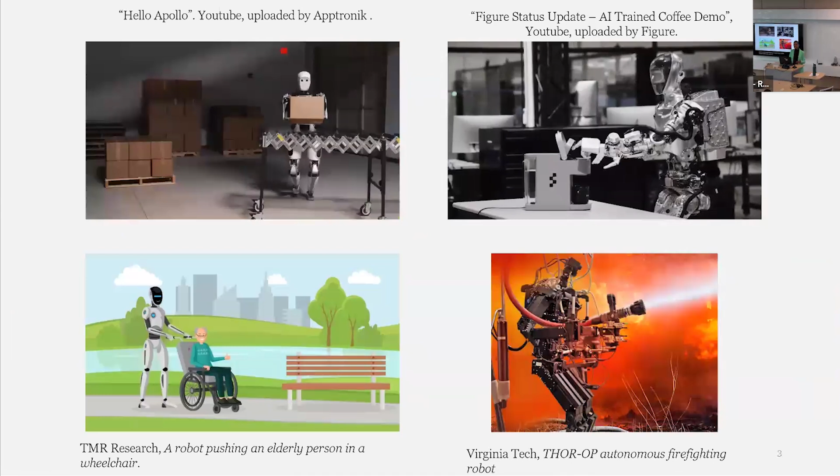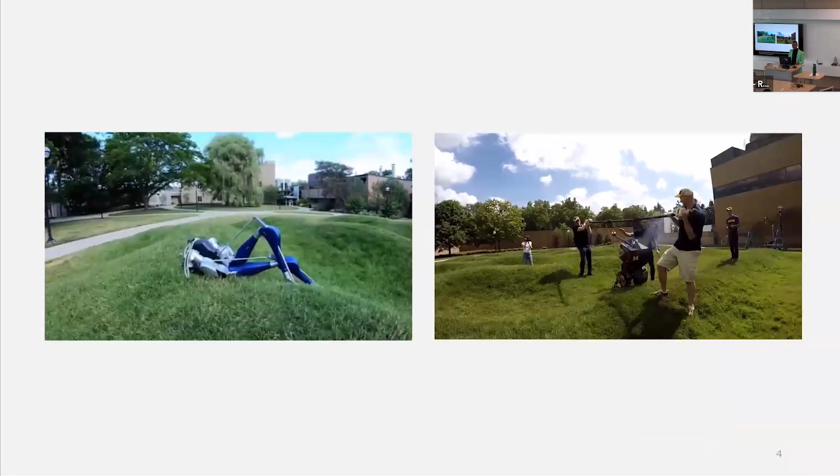However, despite their unique capabilities, the real-world deployment of bipedal robots is limited. Their limited deployment can be attributed to various factors, such as their highly dimensional, hybrid, and at times highly constrained nature, which makes it challenging to achieve a stable motion, especially in the face of disturbances and uncertainties. These disturbances and uncertainties can lead to a fault, which can then lead to a fall, as demonstrated by Cassie and MARLO on the screen.

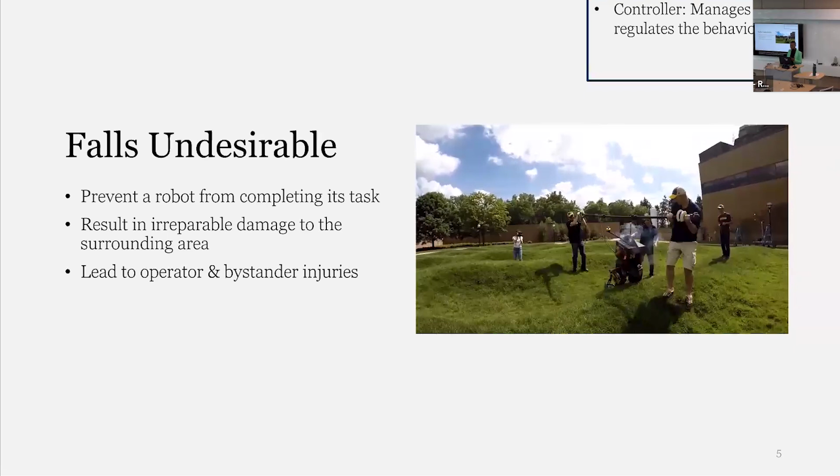Falls are undesirable because they can prevent the robot from completing its task, they can result in irreparable damage to the surrounding area, and they can also lead to operator and bystander injuries. And while a well-designed controller can counteract the effects of these disturbances and uncertainties, the infeasibility of accounting for all the potential disturbances and uncertainties that may be encountered during real-world operation still makes falls inevitable. Therefore, it's not only important to implement robust control algorithms, but also reliable fall prediction algorithms.

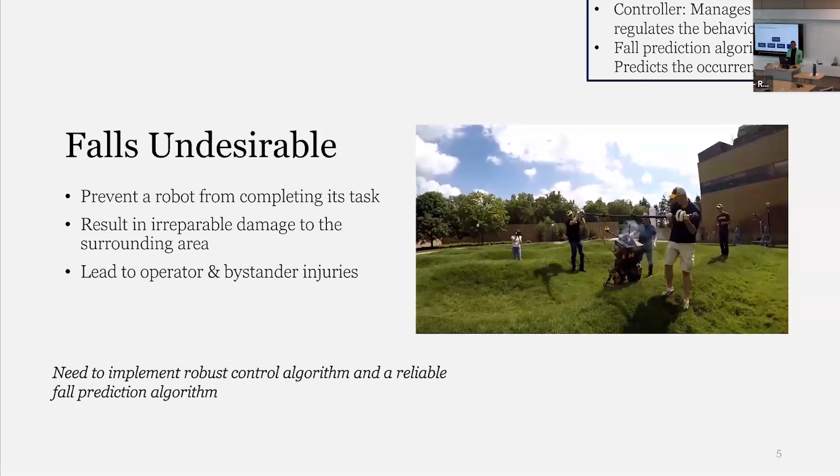A way to do this is through the Fall-Tolerant Framework, whose objective is to enhance the robot's ability to navigate unstructured environments by equipping it with capabilities to assess, adapt, and respond effectively to uncertainties and disturbances. This framework achieves this through a combination of various algorithms, such as a robust controller, a fall prediction algorithm, a recovery algorithm, and so on. My research objective has therefore been to contribute to the implementation of a fall-tolerant framework for bipedal robots by developing robust controllers and reliable fall prediction algorithms. As such, today I will be presenting my contributions through two projects.

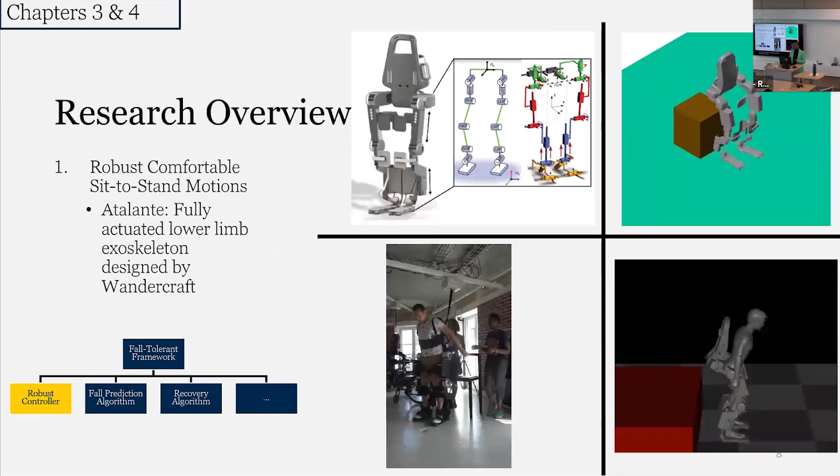The first project is on robust, comfortable sit-to-stand motions for the fully actuated lower limb exoskeleton Atalante that is designed by Wandercraft. This project contributes directly to the robust controller part in the Fall-Tolerant Framework. In comparison to literature, the contributions of this project are as follows. We modeled the sit-to-stand motion using the full 3D exo system, whereas in literature, only the sagittal plane portion of the sit-to-stand motion is captured, which makes it difficult to ensure that the hardware constraints are met in the other planes of motion. Secondly, an analysis of two dynamic sit-to-stand motions, which we term chair-to-stand and chair-to-crouch-to-stand. As you will soon see, each of these motions is ideal for certain perturbations. In literature, the motions generated are only for simplified models of the exo system, and they mostly match only the chair-to-stand motion.

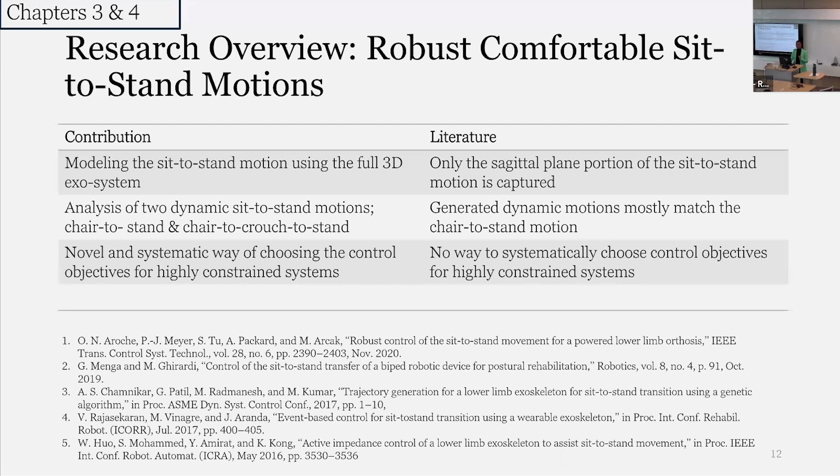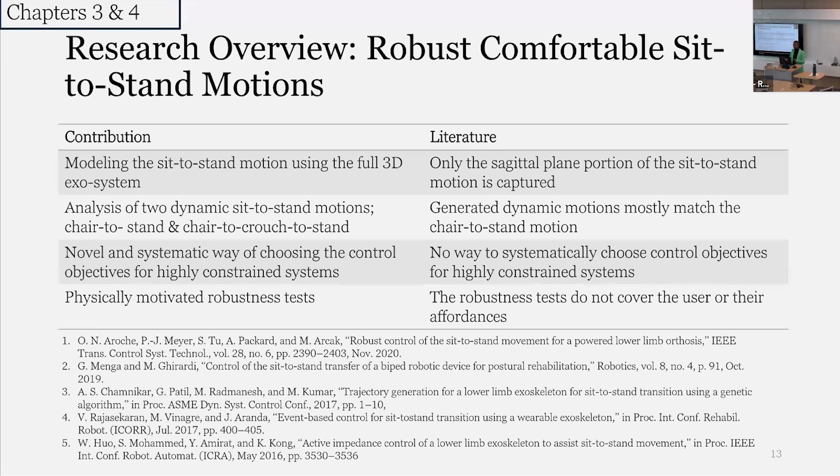Next, a novel and systematic way of choosing the control objectives for highly constrained systems such that they are independent of the contact constraints. To the best of my knowledge, no such systematic way exists in literature. And last, physically motivated robustness tests that do cover the user and their affordances. Because of this, the results of these tests can be utilized to inform new hardware design or to further robustify the controller. Here are the related publications for this project, or you can scan the QR code if you so wish.

See somebody trying to scan.

Okay. The next project is on developing reliable fall prediction algorithms for bipedal robots. This project utilized two different robots, a planar four-link robot based off of the Atalante exoskeleton, and the Digit bipedal robot designed by Agility Robotics. As the name implies, this project contributes directly to the fall prediction algorithm part in a fall-tolerant framework. In comparison to literature, the contributions of this project are as follows.

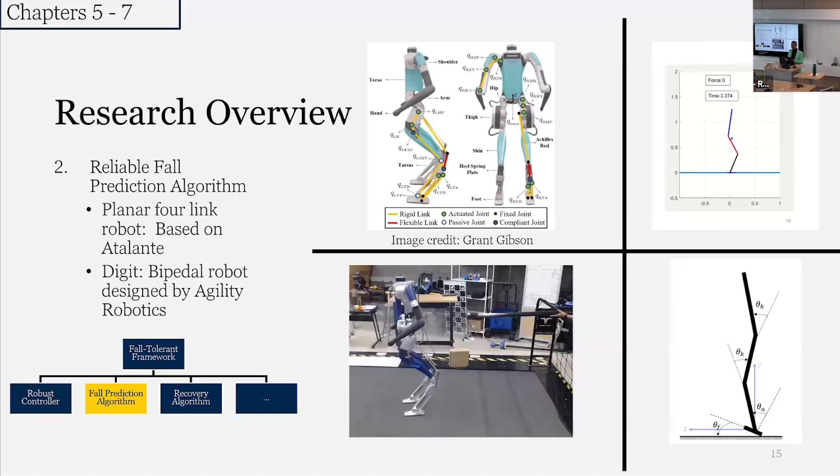In this project, we are capable of detecting falls arising from multiple faults, whereas in literature, they only detect falls that arise from one type of fault. Secondly, our algorithms are capable of estimating the time left to recover. To the best of my knowledge, no such method exists in literature. And lastly, we have an open source data set of a full-size 3D robot that's comprised of both simulation and hardware trajectories with various faults.

Again, to the best of my knowledge, no such data set exists in literature. In terms of each of the individual robots, the contributions are as follows. For the planar 4-link robot, a multi-classification-based algorithm that is capable of detecting multiple faults while providing sufficient time for corrective motions to be taken, as well as a comparison of physics-based and data-based algorithms.

For the Digit robot, a 1D CNN-based algorithm that is capable of detecting multiple faults and predicting the time left for corrective motions, both offline and online in simulation as well as in hardware. And lastly, the open source data set that is comprised of simulation and hardware trajectories for the Digit bipedal robot. Here are the related publications for this work.

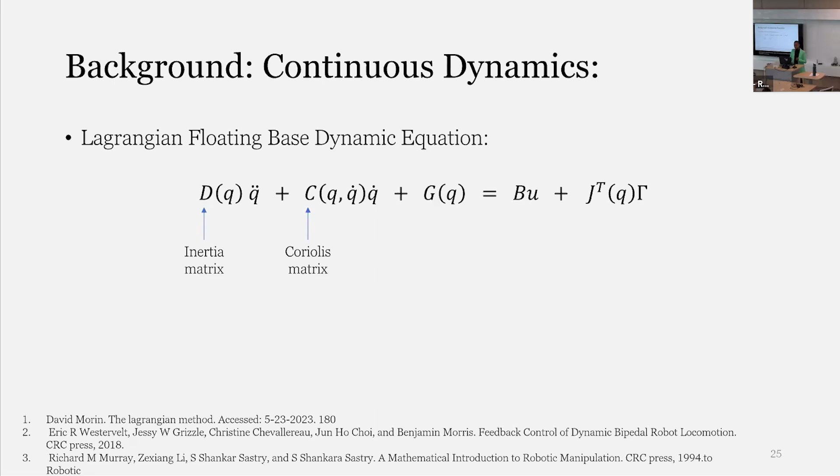Next, the continuous dynamics of a bipedal robot can be represented using the floating-base dynamic equation shown on the screen, which is derived using the Lagrangian method. This equation consists of an inertia matrix, a Coriolis matrix, a gravitational vector, a torque distribution matrix, a Jacobian that maps your contact wrenches gamma to your generalized coordinates q, and finally, your control input.

This equation has 2 unknowns, your generalized coordinates q and your contact wrenches gamma. Therefore, we need a second equation in order to solve for these unknowns. The second equation takes the form of the contact constraint, and this equation essentially ensures that the contacts that the robot makes with its environment are respected. Let's now delve into how we achieved these robust, comfortable sit-to-stand motions.

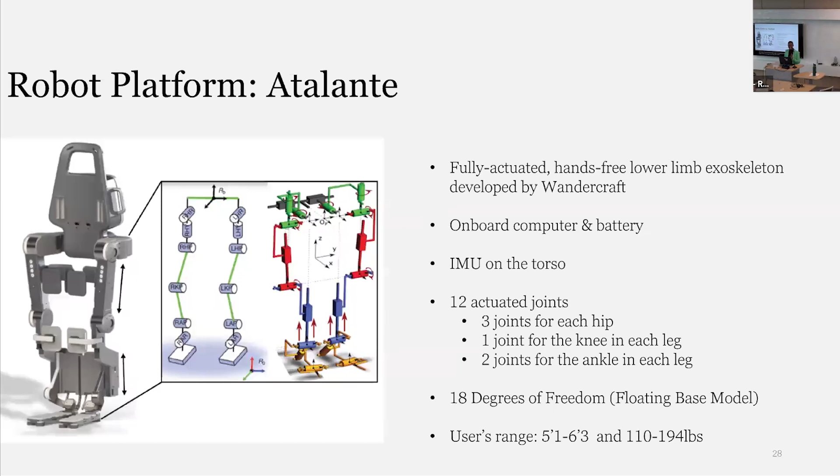Atalante has an onboard computer and batteries, and has an IMU on the torso. It has 12 actuated joints, and its user's range is as follows: 5'1" to 6'3", and 110 to 194 pounds, which meant that I barely made the cutoff for using Atalante, but I did.

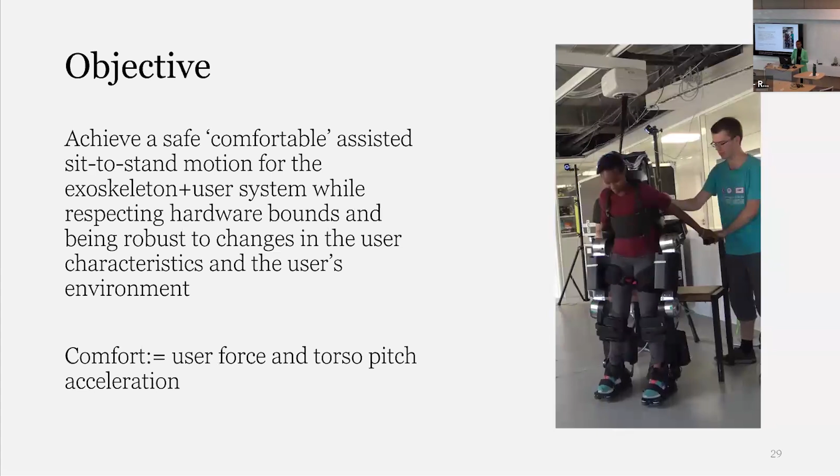Our objective for this project was to achieve a safe, comfortable, assisted sit-to-stand motion for the exoskeleton plus user system, all while respecting the hardware bounds and being robust to changes in the user characteristics, such as having different users in the exoskeleton, and the user's environment, such as having different chair heights. Here, we define comfort in terms of user force and torso pitch acceleration.

Therefore, we decided to develop 2 dynamic sit-to-stand motions using hybrid systems: the chair-to-stand motion and the chair-to-crouch-to-stand motion. The chair-to-stand motion consists of 2 domains, the sitting domain and the standing domain, whereas the chair-to-crouch-to-stand motion consists of 3 domains: the sitting domain, the standing shift domain, and the standing extend domain.

Given that the exoskeleton is in contact with the chair during the sitting domain, it has 3 contact points, the chair and the feet. In the other domains, the exoskeleton only has 2 contact points, the feet, given that it is no longer in contact with the chair.

The difference between these 2 motions is as follows. For the chair to stand motion, the center of mass is shifted forward and the joints are simultaneously extended, whereas in the chair to crouch to stand motion, the center of mass is first shifted forward and the joints later extended. Furthermore, the chair to stand motion is constrained to be symmetric along the sagittal plane. In other words, the left and right hand sides of the exoskeleton are constrained to mirror each other, whereas the chair to crouch to stand motion is allowed to be asymmetric.

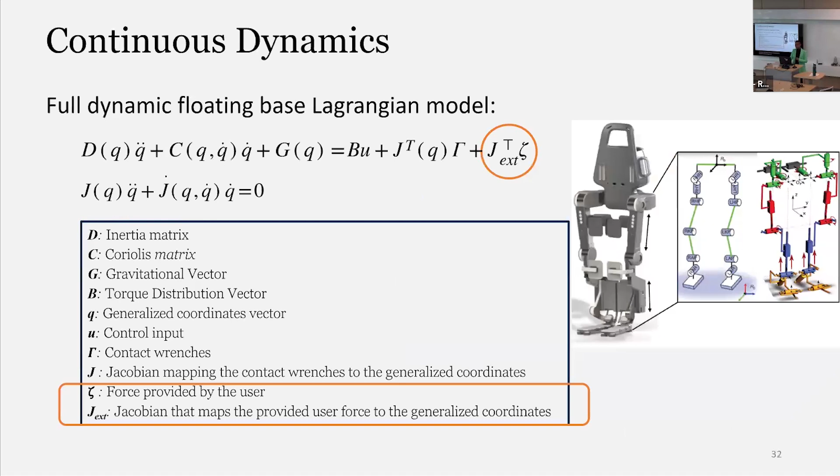The continuous dynamics for each of the domains are derived using the floating-based Lagrangian model that we went over in the background. Note the 2 additional terms that pop up here due to user force. The open source package FROST that is designed by Professor Ayonga Hereid was utilized to generate the 2 trajectories for the sit-to-stand motions.

Due to the highly constrained nature of the equations of motion for the sit-to-stand task, we decided to design our control objectives such that they are well-defined and independent to the desired contact constraints. We do this so that the controller is not actively fighting against the contact constraints and such that there exist control inputs that allow the robot to achieve its desired task. To find these control objectives, we use the contact interaction matrix on the screen, as well as optimization. In the next few slides, I will briefly go over the derivation of this matrix.

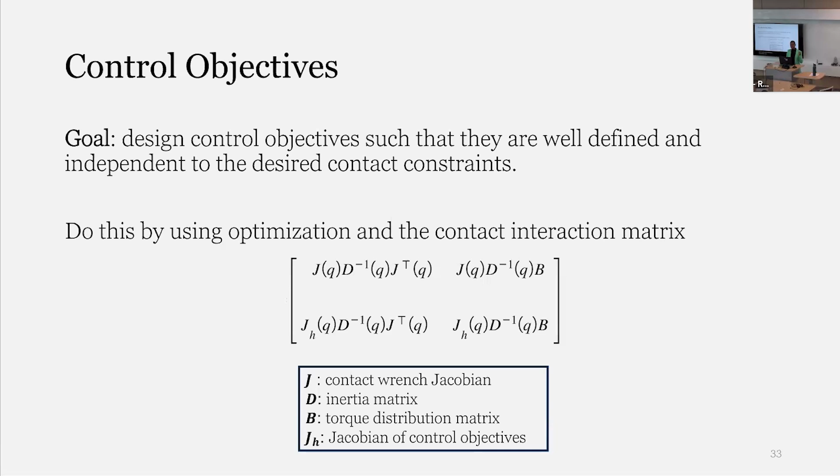Given your tracking error, which is defined as the difference between your actual parameter and the desired evolution of those parameters, our control objective is to drive the tracking error terms to 0. If the desired evolution of our parameters HD is twice differentiable, we can then define the double derivative of our tracking error as follows, where JH is the partial derivative of our actual parameters H0 with respect to our generalized coordinates Q. In other words, JH is the Jacobian of H0.

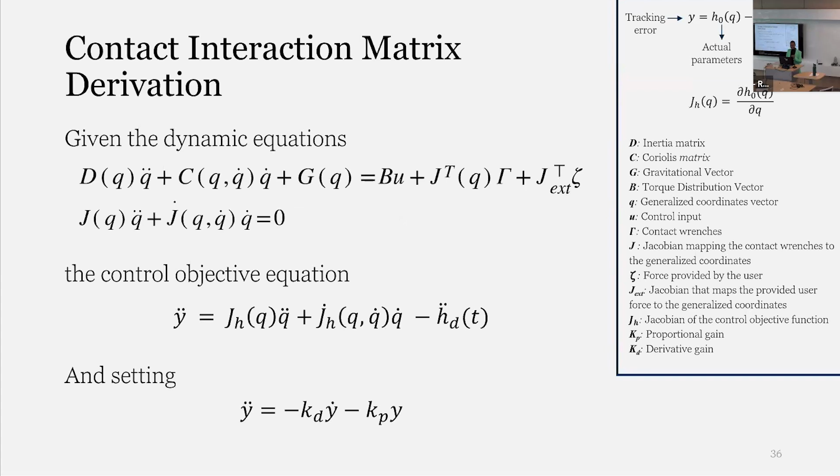Now, given the dynamic equations, the control objective equation, and setting the double derivative error to the following equation, our equations of motion can now be written as follows, where M is the contact interaction matrix, and it captures the interaction of the contact wrenches and the motor torques in achieving the contact constraints and control objectives. The top row of this matrix is fixed by the dynamic equation, whereas the second row depends on the Jacobian of the control objective function H0.

Given this, in order to design our control objectives, we implement an optimization to find H0 such that its Jacobians approximately satisfy 2 equations related to the second row of the contact interaction matrix. The first equation ensures that the control objectives are in the null space of the contact constraints. When this equation is satisfied, the controller does not act in the directions of the contact conditions. The second equation ensures that there exists a U such that our equations of motion are satisfied. This is because M is not necessarily a square matrix, and it might actually be rank deficient.

In order to implement the trajectories that were found with trajectory optimization using FROST, as well as our control objectives, we designed a quadratic programming-based input-output linearization controller. This controller minimizes the error between the nominal and applied motor torques and the nominal and applied user force. Additionally, it enforces the equations of motion, as well as feasibility constraints, such as constraining the zero moment point to be inside the support polygon.

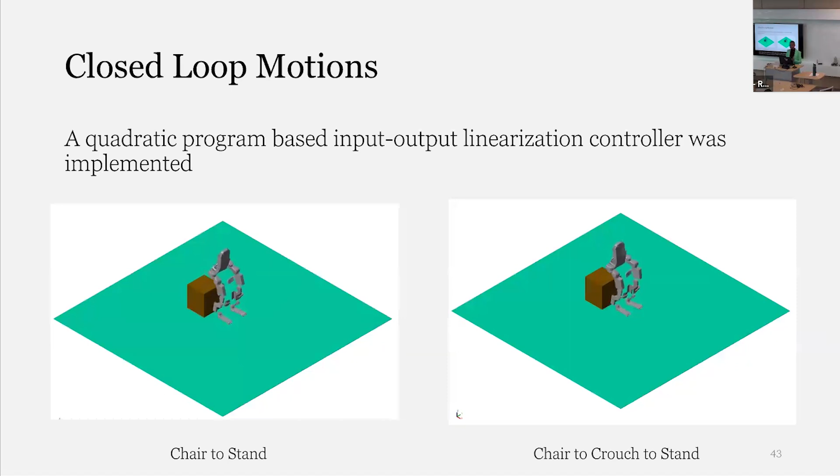To analyze the range of operability of the 2 closed-loop sit-to-stand motions, we decided to employ the use of physically motivated robustness tests. We do this because the highly nonlinear nature of our problem made it infeasible to analytically implement stability methods. In the robustness tests, we subjected our controller to the following perturbations.

Different users in the exoskeleton, different chair heights, zero user force, spasticity in the knee joints, and asymmetric motor torque controls. Our criteria of success was as follows: tracking and steady state error, torso pitch acceleration, user force expected by the controller, ZMP and friction constraint violation, and finally, joint and motor torque limits.

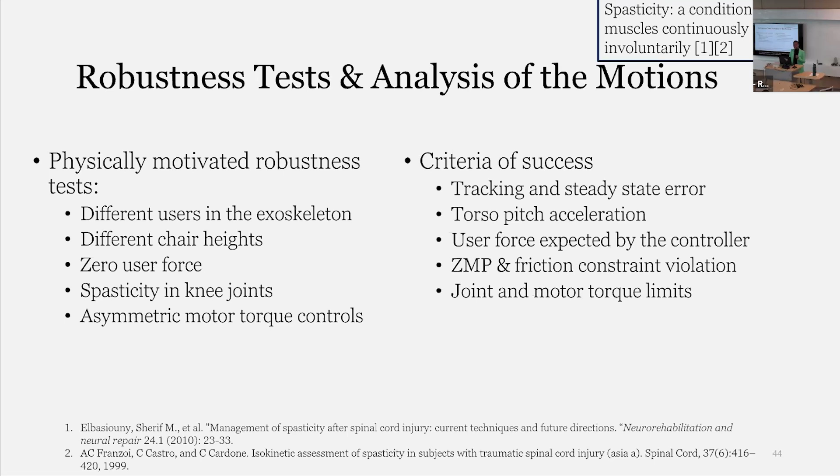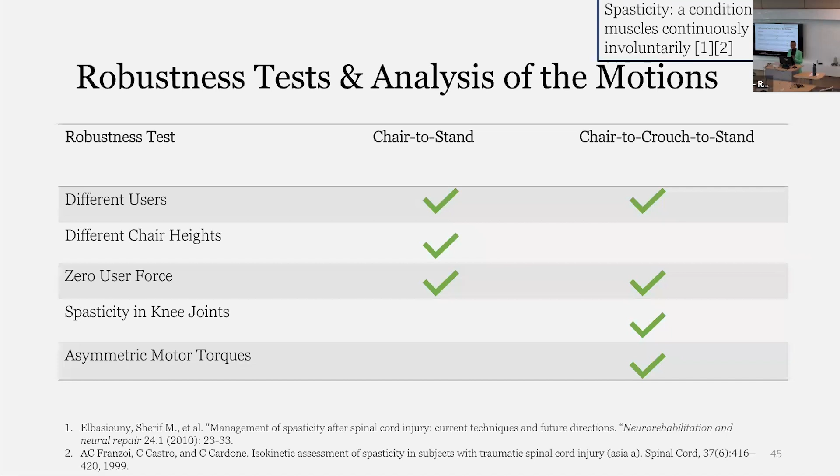From these physically motivated robustness tests, we found out the following. Both motions handle various users in the exoskeleton well. The chair to stand motion is better at handling changes in chair height, that it's possible to achieve unassisted sit to stand motions, and finally, that the chair to crouch to stand motion is better at rejecting perturbations that result in asymmetry.

To further assess the effectiveness of our control objective as well as our controller, we compare them to related work in literature. Note that the control objectives in literature consist of a combination of the center of mass and the joint angles of the exoskeletons, and the controllers that are utilized have a similar objective function to our controller, but they don't enforce all the feasibility constraints that our controller does.

From this comparison, we found out the following. Our control objectives are better at respecting contact constraints, and they actually result in lower torso pitch acceleration. And finally, our controller was able to reject more perturbations.

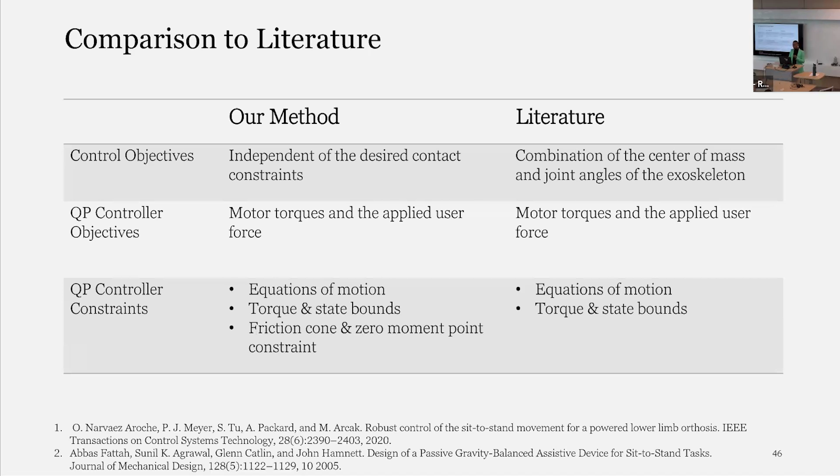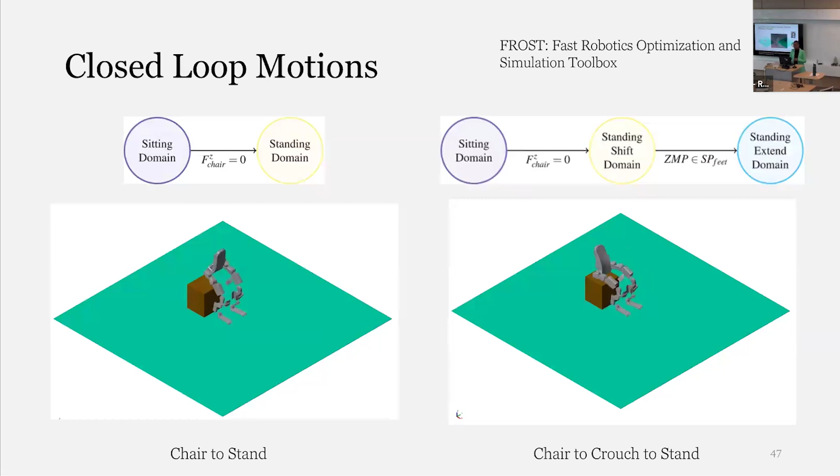Our analysis so far has been done on closed-loop motions that were derived in the FROST simulator, which does not take contact dynamics into account and therefore does not simulate real-world conditions. Recall that FROST is the open source package that was utilized to generate the two trajectories for the two sit-to-stand motions. Therefore, in order to emulate the real-world conditions that the exoskeleton would operate in, we decided to continue our analysis with two simulators that do take into account contact dynamics, Jiminy as well as MuJoCo.

In summary, this project contributed to the implementation of robust controllers by introducing a systematic way of choosing control objectives. To analyze the range of operability of the resulting two closed-loop sit-to-stand motions, we used physically motivated robustness tests. To assess the effectiveness of the proposed control objectives and controller, we compared them to related work in literature, and we found that our control objectives were better at respecting contact constraints and that they resulted in motions that required lower torso pitch acceleration. We also found that our controller was better at rejecting perturbations.

Lastly, in order to emulate real-world conditions, we implemented the sit-to-stand motions in two simulators that do take into account contact dynamics. The future work for this project is as follows: an extension to other robotic platforms, as well as to other motions, and implementation on hardware if Atalante cooperates with us.

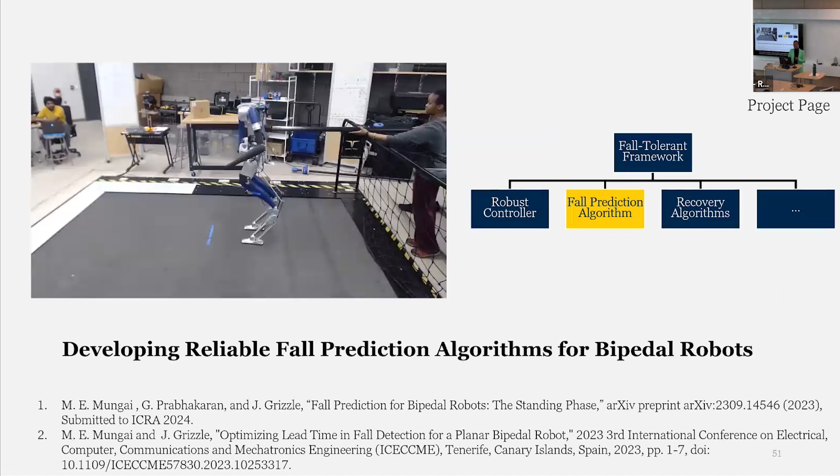I'd now like to move on to the fall prediction project. Some background information. Falls are caused by faults, which are defined as unforeseen deviations in one or more operational variables. In terms of their time dependency, faults can be categorized into three different categories: abrupt faults, which are step-like or rapidly varying; incipient faults, which evolve gradually over time; and lastly, intermittent faults, which are sporadic or non-continuous.

The states of a robot can in general be divided into three classes: safe, falling, and fallen. The safe class can be categorized as normal, and the falling and fallen class can also be categorized as faulty. And lastly, as discussed by the authors in 1, individual stability metrics could be a necessary but not sufficient condition to predict falls. Let's now delve into the design of a reliable fall prediction algorithm for bipedal robots.

The objective of a fall prediction algorithm is to reliably detect critical faults with sufficient lead time to deploy a recovery strategy. Critical faults are defined as faults that lead to a fall. Lead time is defined as the time to react, and it is defined as the difference between the time of the actual fall and the predicted fall. Note that literature suggests a minimum lead time of about 0.2 seconds, and here reliability is determined using false positive rates and false negative rates.

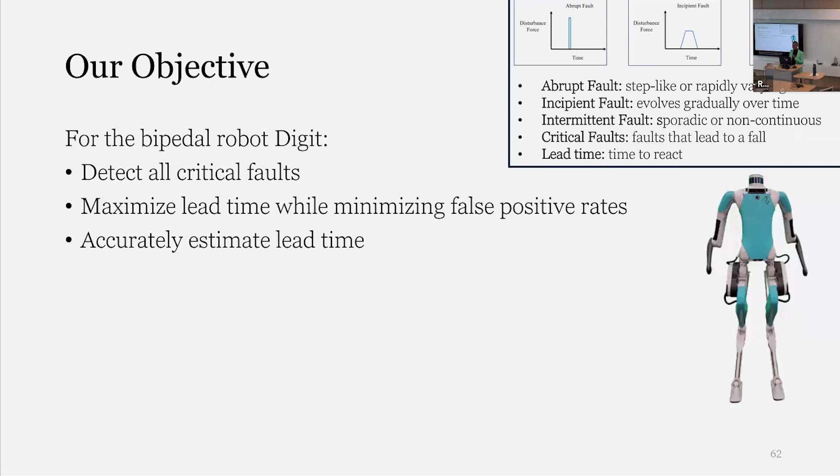Our objective is as follows. For the bipedal robot Digit, we would like to detect all critical faults, maximize lead time while minimizing false positive rates, and lastly, accurately estimate lead time. The challenges that are associated with this objective are as follows. The crowding phenomenon caused by incipient faults. This is the similarity between the normal and faulty data, which makes it difficult to separate the normal data from the faulty data.

The masking effects of the controller as it tries to mitigate the effects of the fault. The direct relationship between false positive rate and lead time; in other words, maximizing lead time can actually lead to high false positive rates. The sporadic nature of intermittent faults. And lastly, the diminishing number of data points with increasing lead time.

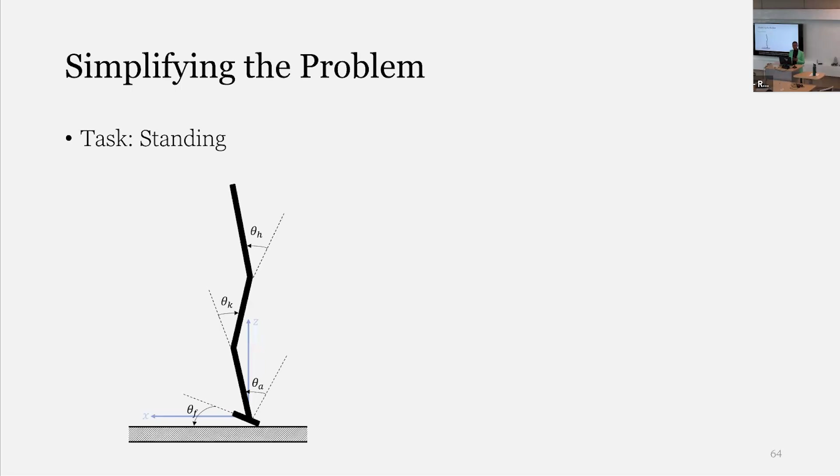Given all of these challenges, we decided to start our investigation by developing a fall prediction algorithm for the task of standing with a planar 4-link robot. We do this as a way of simplifying the problem, all while providing a means to scale up to more complex robots such as Digit and more dynamic motion such as walking.

The problem statement for the planar 4-link robot is as follows. Given an upper bound on false positive rate and false negative rate, we aim to develop a fall prediction algorithm for the task of standing that detects all critical faults while maximizing the lead time. Here, a fall is defined as any link other than the feet coming in contact with the ground or the feet being off the ground, and critical faults are emulated by applying forces to the torso.

We solve this problem statement in 2 steps. The first is the detection of critical, abrupt, and incipient faults, and the second is the detection of all 3 critical faults. To detect critical, abrupt, and incipient faults, we propose 2 binary classification algorithms, the SVM-based binary classifier and the nearest neighbor-based binary classifier.

And in order to validate our presented methodology, we introduced a new data set. This data set includes both simulated trials and hardware tests for the bipedal robot Digit.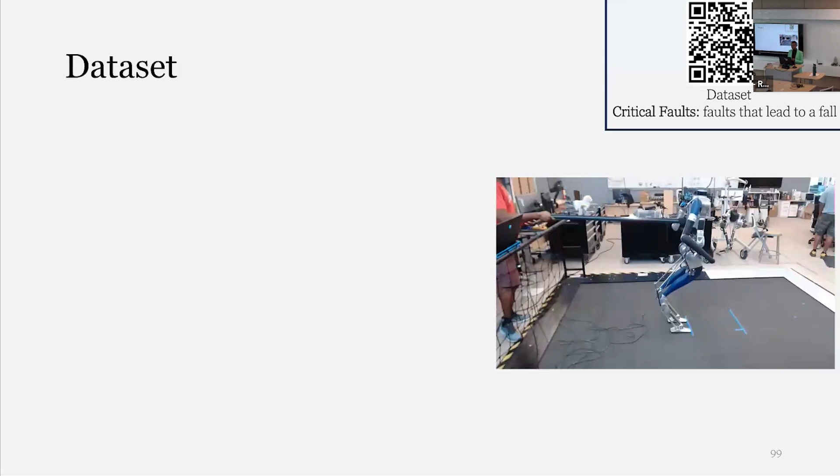In order to prevent the robot from sustaining damage during hardware data collection, we did not allow the robot to fall to the ground. Therefore, the true lead time isn't known for hardware data. Instead, we use response time, which is the time to detect, and it's defined as the difference in time between the detection of the critical fault and its introduction. Note that response time is undefined for intermittent faults, given the fact that they're comprised of multiple faults. We now define a fall when the center of mass is below 0.12 meters for simulation and 0.95 meters for hardware, because again, the robot was not allowed to fall all the way for hardware.

We will now evaluate the performance of the individual components of the proposed algorithm when trained on abrupt and incipient simulation data and evaluated offline on various faults in hardware as well as simulation. We start with the critical fault classifier. And as you can see, the critical fault classifier is successful at detecting all three critical faults both in hardware and simulation, with lead times way greater than 0.2 seconds and with 0 false positive rate. The difference in response time that you can see between hardware and simulation data can be attributed to the lower force profiles that were applied in hardware. In fact, when we applied these same lower force profiles in simulation, the simulation data resulted in the same behavior that we observed in hardware.

Given that the true lead time is unknown for hardware data, we assess the effectiveness of the lead time classifier using just simulation data. And as you can see, the lead time classifier achieves an accuracy greater than 95% for lead times less than 2 seconds and an accuracy of 80% for lead times greater than 2 seconds. This decrease in accuracy for lead times greater than 2 seconds can be attributed to the diminishing number of data points with respect to lead time.

For all the videos that will be shown in this section, the switch from the nominal standing controller to the recovery controller will be visualized by a green circle appearing around Digit in the highlighted video. Again, note that this switch will be determined by our fall prediction algorithm. The other video will showcase the Digit robot falling when the switch is not made, and the time of the simulation will be shown here.

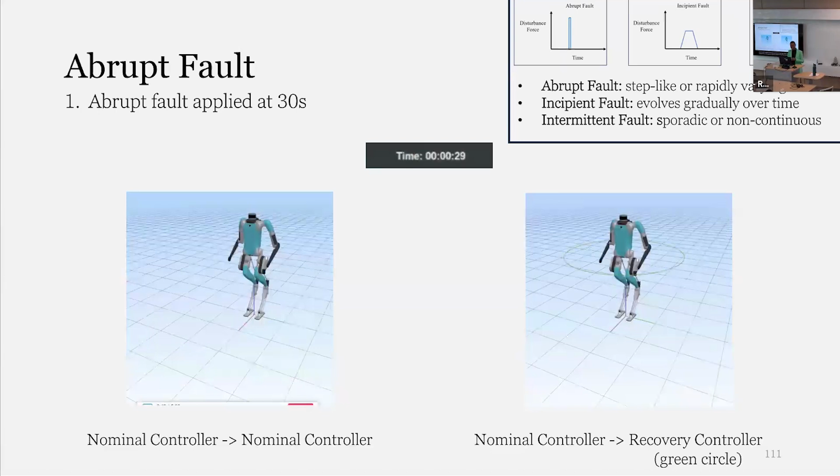We will start with a critical abrupt fault that is applied at 30 seconds. And as you will soon see, if the controller is not switched when our fall prediction algorithm predicts the critical fault, the robot falls. That will play again. A similar phenomenon is observed for a critical incipient fault applied at 20 seconds. And we can see that again.

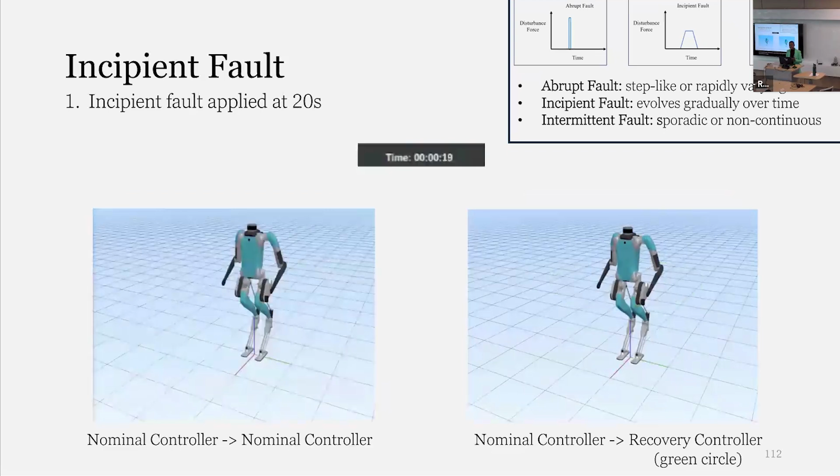Next, we will take a look at the algorithm's performance on intermittent faults that are comprised of 2 faults. In the next few slides, we will again see the Digit robot falling when a fall is predicted by the algorithm, but a recovery controller is not activated. We start with an intermittent fault comprised of 2 abrupt faults.

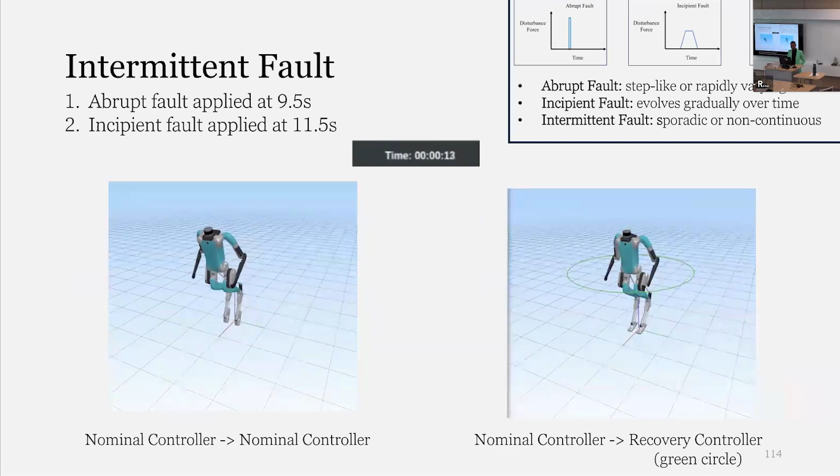Next, an intermittent fault comprised of an abrupt fault followed by an incipient fault. Next, an intermittent fault comprised of an incipient fault, which is then followed by an abrupt fault. And lastly, an intermittent fault that's comprised of 2 incipient faults.

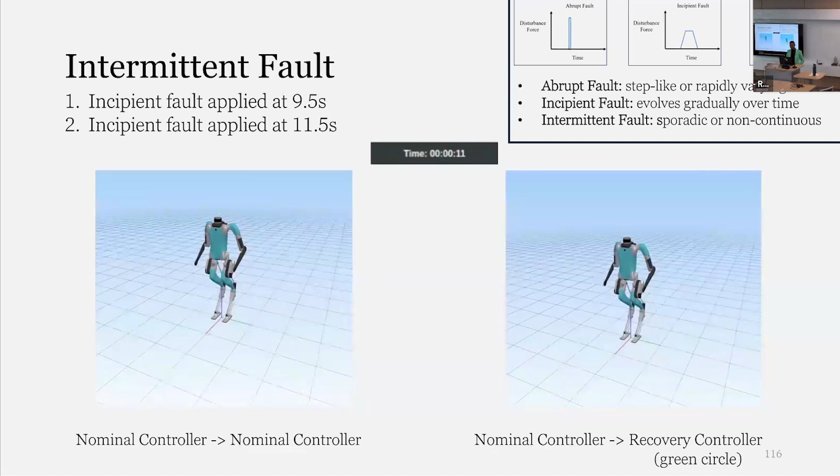For hardware tests, we demonstrate the effectiveness of this algorithm by showcasing its ability to detect all 3 critical faults. Note that due to the complexity of replicating the same fault twice in hardware, we will not perform tests that demonstrate the Digit robot falling when a fall is predicted, but the recovery controller is not activated, as was done in simulation.

For all the videos in this section, the detection of the critical fault, and therefore the switch to the recovery controller, will be visualized on the highlighted video with the appearance of a green circle, as you can see on Digit right now. It will also be noted on the bottom right of the highlighted video. And the types of faults will also be noted on the bottom left of this video.

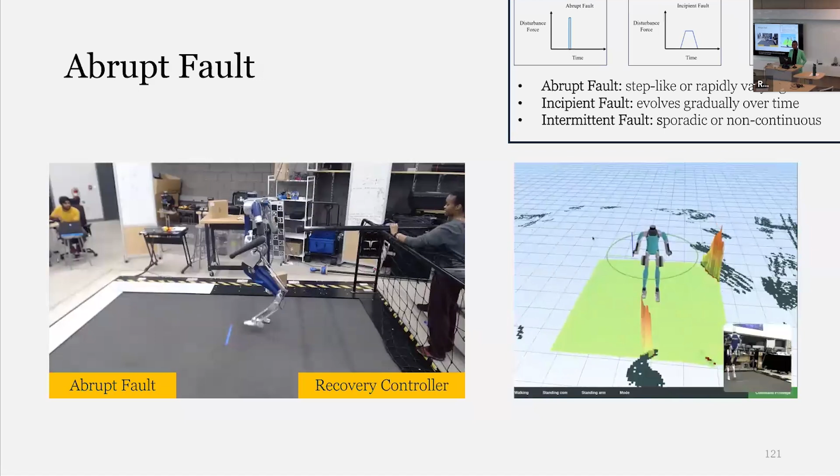We start with a critical abrupt fault, and as you will soon see, the algorithm successfully detects the critical abrupt fault and triggers a switch to the recovery controller. We can take a look at that again. It performs similarly for a critical incipient fault. There we go.

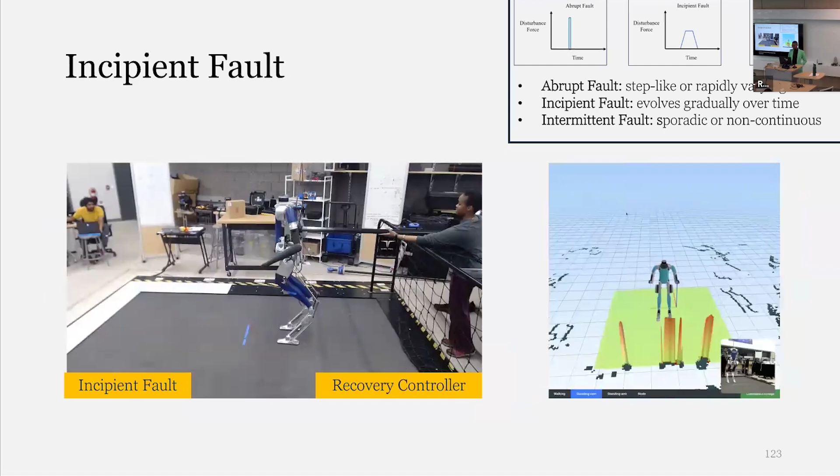And now for an intermittent fault, we test the algorithm's performance on a critical intermittent fault that's comprised of 3 faults: an incipient fault, an abrupt fault, which is then lastly followed by an incipient fault. And again, the algorithm successfully detects this critical intermittent fault and triggers the switch to the recovery controller. So now for the abrupt fault, and next for the incipient fault. And now we trigger the switch.

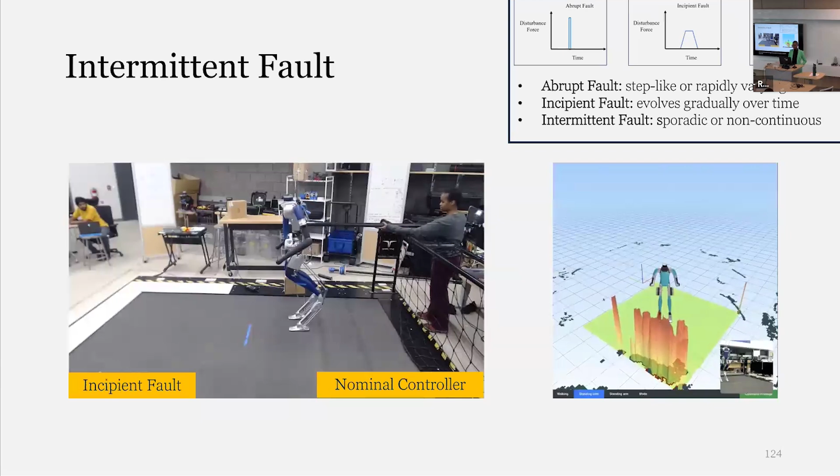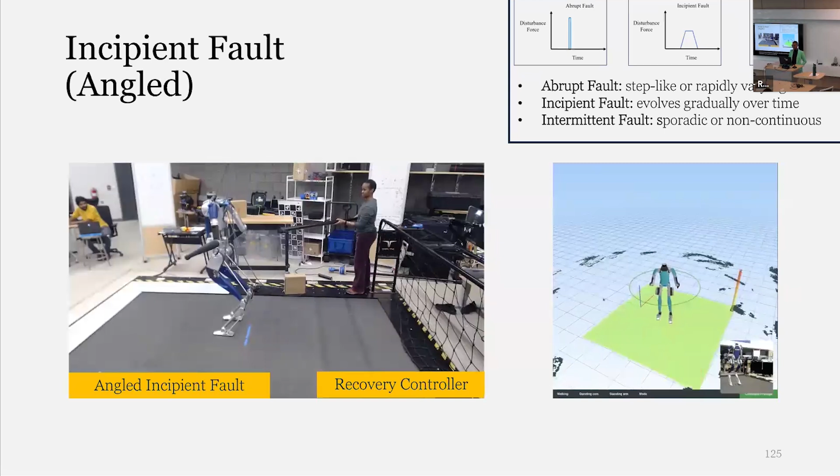Given the algorithm's successful performance on all 3 critical faults, we decided to test the performance of the algorithm on faults that are introduced from angled pushes. Note that the algorithm was only trained on faults that were introduced by non-angled torso pushes. But despite this, the algorithm is still able to successfully detect the critical angled incipient push, as you will see here. Now it triggered the change. It performs similarly well for a critical abrupt fault that's introduced by an angled push.

Next, given the algorithm's successful performance on all of these previous tests, we decided to test its performance on an intermittent fault that's comprised of angled and non-angled pushes. And as you will see, it still successfully detects this critical fault. And now for the angled pushes.

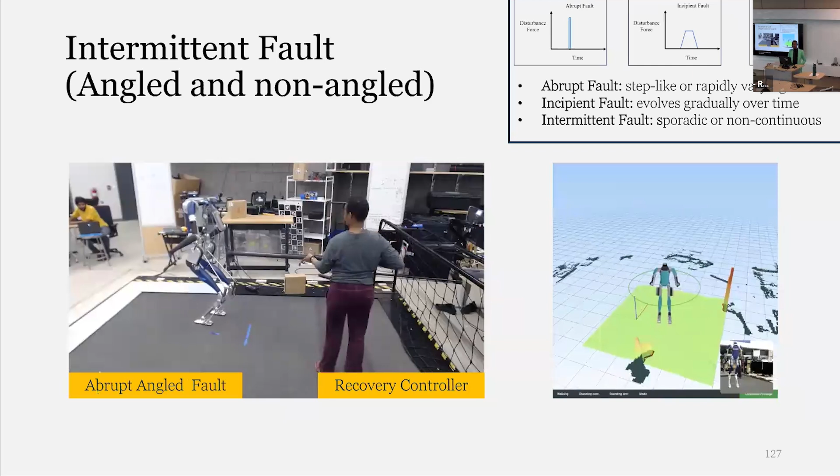And lastly, this is where it will detect. There you go. Now, again, given the algorithm's successful performance, we decided to step up the stakes a little bit and test its performance on an intermittent fault introduced from a leg push. Now, I will be honest, I was very, very nervous during this test, as Gokul will attest. But despite this, the algorithm was still successfully able to detect this critical fault.

Do it. I was very nervous. I did not want to break the robot again. And there again we go. So it successfully detected that.

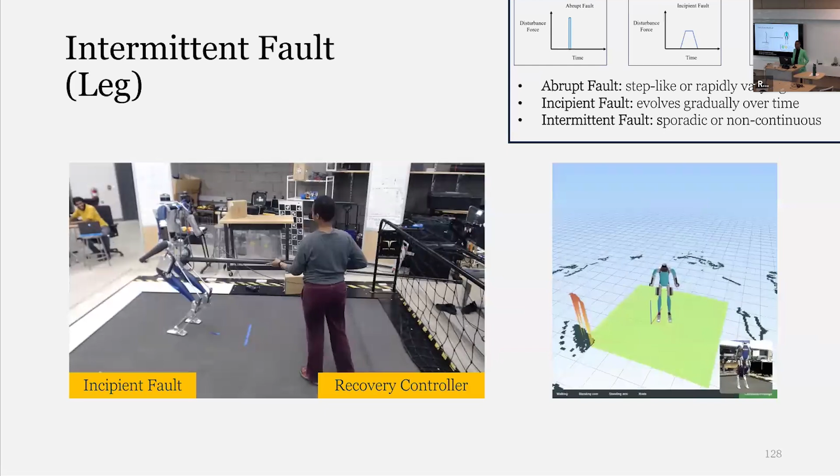Now, up until now, we have implemented data-based fault prediction algorithms for the task of standing for the planar four-link robot as well as Digit. However, data-based algorithms can perform poorly on out-of-distribution data. So we will now investigate the use of a physics-based binary fault prediction algorithm based on the contact interaction matrix. Recall that the contact interaction matrix captures the interaction of the contact wrenches and the motor torques in achieving the contact constraints and control objectives.

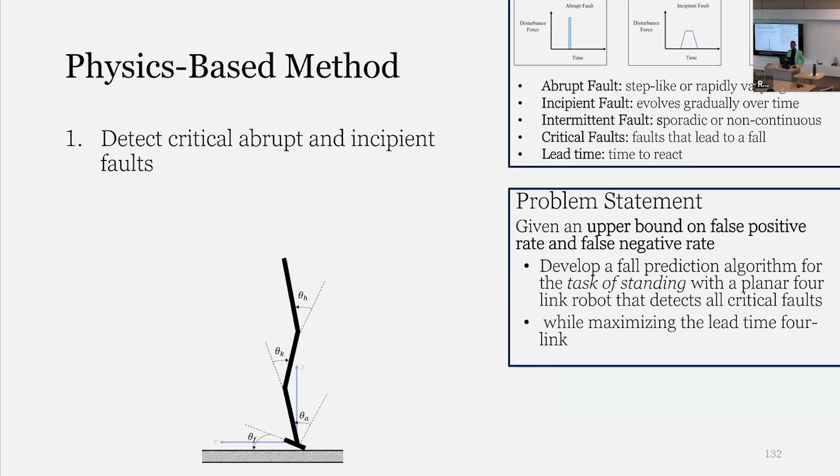Similar to the data-based methods, we will start our investigation by solving the planar four-link problem statement. Here, I will present the preliminary results for detecting critical abrupt and incipient faults. The critical abrupt and incipient faults are detected based on a threshold derived from the condition number of the contact interaction matrix. And as you can see, the contact interaction-based binary algorithm is able to detect critical abrupt and incipient faults with similar results to the SVM binary classification algorithm that we saw previously. This therefore demonstrates the potential of the physics-based method. Again, this is a result with false negative and false positive rates of 0.

In conclusion, this project contributed to the implementation of a reliable fault prediction algorithm for bipedal robots. We introduced a 1D CNN-based fault prediction method that was capable of not only detecting all 3 critical faults, but also estimating lead time for the bipedal robot Digit during the task of standing. We also introduced and analyzed physics-based and data-based methods for predicting faults of a planar four-link robot. Additionally, all the fall prediction algorithms that were introduced in this section achieved sufficient lead time with 0 false positive and negative rates.

The future work for this project is as follows: an expansion of the physics-based method to detect all 3 critical faults in full-sized robots such as Digit, and an extension of the 1D CNN-based method to more diverse environmental conditions, as well as dynamic motions. Given that the projects undertaken in this dissertation focused on developing robust controllers and reliable fault predictions separately, and given the fact that a fault-tolerant framework is comprised of various algorithms working together, additional future directions include the integration of the proposed robust controller and fault prediction algorithms, as well as expanding the implementation scope to include other algorithms, such as a high-level planner or a recovery algorithm.